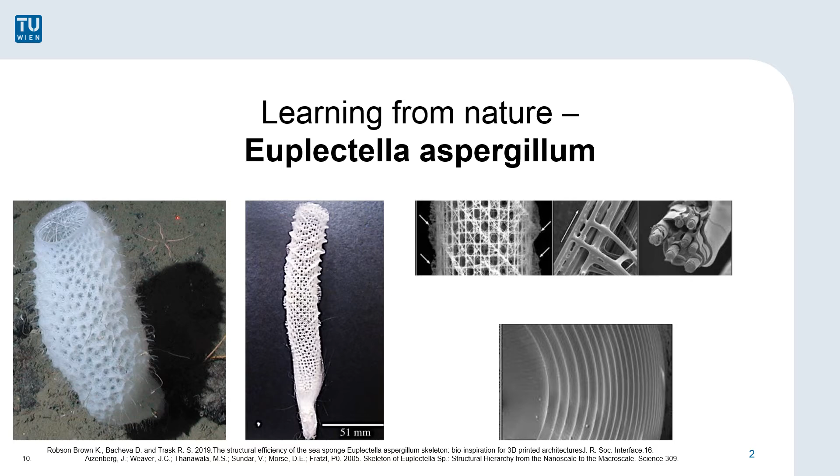Although there is only 1% of proteins present in these spicules, the mechanical properties are improved remarkably. The fracture resistance of the skeleton is 3 times higher than that of homogeneous silica without deteriorating other mechanical properties. Through these building concepts, these spicules and the skeleton itself conserve their strength and stiffness naturally gained by the high glass content and additionally derive high fracture toughness values.

So why are the mechanical properties of this deep-sea sponge so fascinating? If you look at the mechanical properties of engineered materials, it is a very challenging task to produce parts which are strong and stiff on one hand and tough on the other. While strength and stiffness provide high load-bearing capability, high toughness prohibits fracture. Typically, these properties are somewhat mutually exclusive.

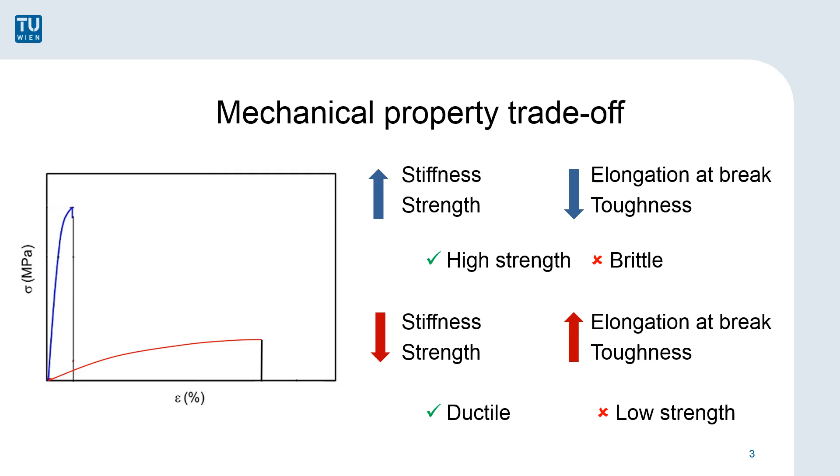We've seen before that the deep-sea sponge manages this impossible task to gain high load-bearing without being brittle like glass. The underlying effect is called the material inhomogeneity effect. The fracture toughness of a brittle bulk material can be drastically increased by the introduction of thin compliant material layers. For this effect to work, the mechanical properties of these materials have to differ substantially. The Young's modulus of the bulk material must be at least 5 times higher than the Young's modulus of the compliant material.

On the left side, you can see a testing sample under tension from top and bottom. Small defects are located inside the sample and statistically distributed. If tension occurs, a crack will start to emerge from these already existing defects. This crack will grow and propagate through the sample until fracture occurs.

The same testing procedure is done with a testing sample where thin layers of another material with significantly lower Young's modulus are inserted. These compliant layers hinder the propagation of the cracks and therefore increase the resistance to fracture. As these soft material layers are very thin, they do not change the other mechanical properties of the bulk material remarkably.

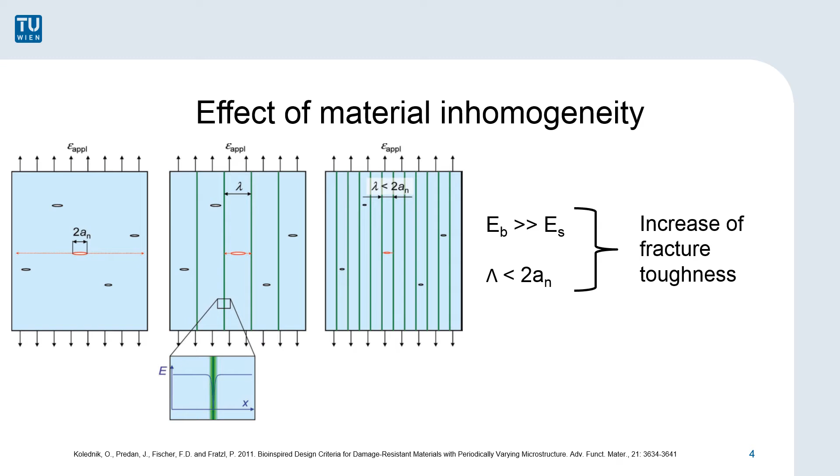With that, I would like to come to the third term, which is 3D printing. 3D printing is based on the principle of the production of samples in a layer-wise process. In our case, the raw materials are photopolymers based on acrylates and methacrylates. In combination with the photoinitiator, these liquid substances form polymer chains and solidify by radical chain polymerization when exposed to a suited light source. The principle of radical chain polymerization is used in a stereolithographic or SLA process.

The liquid material inside the vat is exposed to a UV light source, which induces the solidification of the resin. The hardened material sticks to the building platform. After the solidification of the first material layer, the platform is moved upwards and the vat is coated with fresh liquid resin by a coating mechanism. Repeating this process, we can build a three-dimensional part layer by layer.

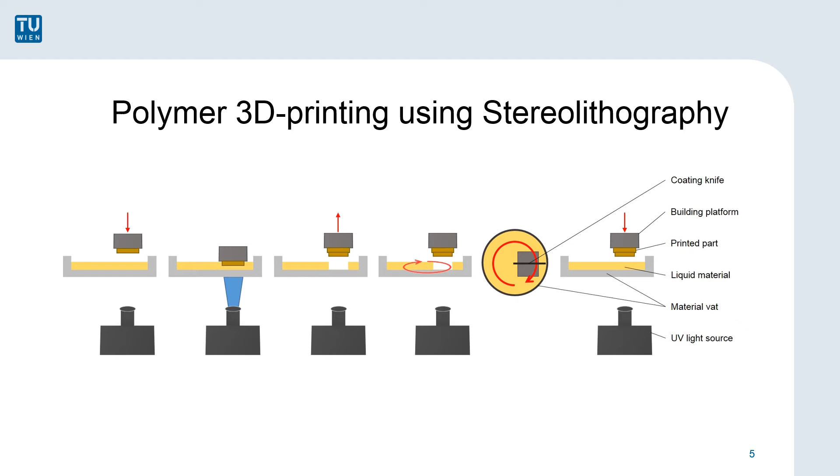In this particular study, the samples are a composite consisting of inorganic tricalcium phosphate and organic polymers. These samples tend to be very stiff and show almost no elongation at break, resulting in a very brittle behavior.

In order to adapt the mechanical properties and improve the toughness of the brittle bulk material, we mimicked the structure of the spicules of the deep sea sponge. A hybrid printing system able to produce samples out of two different raw materials is used. This system consists of the aforementioned SLA process and an inkjet printing system. The SLA produces layers of strong and stiff material, while the inkjet system yields soft, compliant material layers.

In the first step, the building platform moves into the vat with the liquid resin, and UV light is used to solidify the first layer. The building platform with the adherent layer moves upwards and rotates so that the layer faces an inkjet printhead, which is located above the SLA printer. Now, the printhead places small droplets of ink onto the solidified resin layer. The liquid ink is solidified using an LED array.

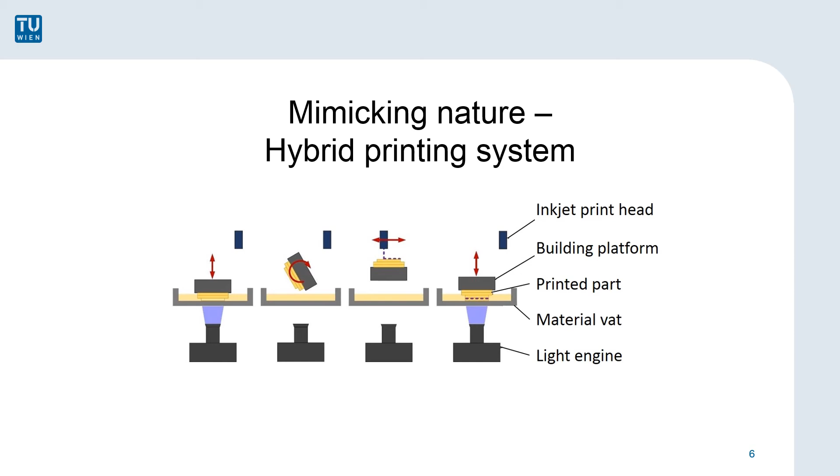The solidified ink adheres to the resin layer and the building platform rotates downwards again. It immerses into the resin vat and the second resin layer is printed. This process is repeated until a two-material part is printed.

The material composition for the resin, which is white, and the ink, which is red, differ substantially. The resin consists of different acrylates and methacrylates to ensure sufficient reactivity and cross-linking. Additionally, a photoinitiator is required for the start of the polymerization process. An absorber prohibits polymerization at undesired locations due to light scattering. Finally, tricalcium phosphate particles are used as a filler to create a stiff and brittle material.

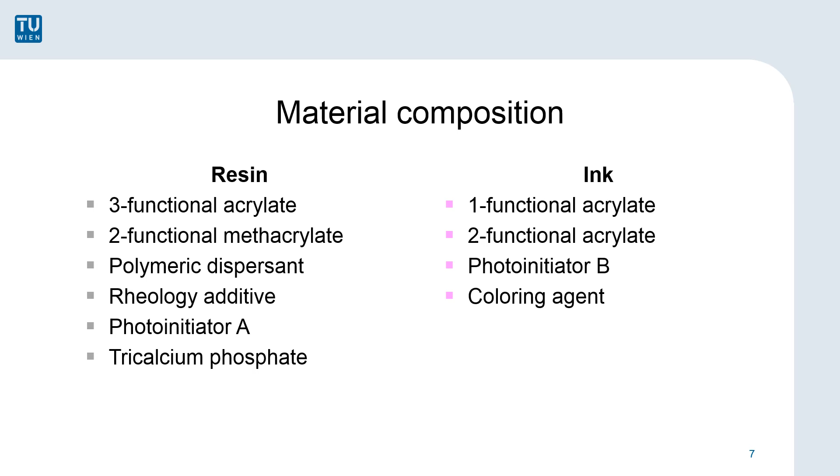The ink, on the other hand, is composed of a low viscosity acrylate, a cross-linking agent, a photoinitiator, and a red coloring agent. This composition leads to a very soft and compliant material. 3 sample groups are printed for the verification of the concept. The first group is built of separated alternating layers of resin and ink. This group represents the bio-inspired approach. The second group is the reference group, solely consisting of the resin. This resembles the bulk material.

To ensure that a potential effect is related to the structure of the samples with separated material layers and not from the addition of a soft material, a third group is produced. This group consists of a blend of resin and ink mixed before the printing process. These samples are printed solely with the SLA process. The amount and the ratio of ink and resin for groups 1 and 3 are identical.

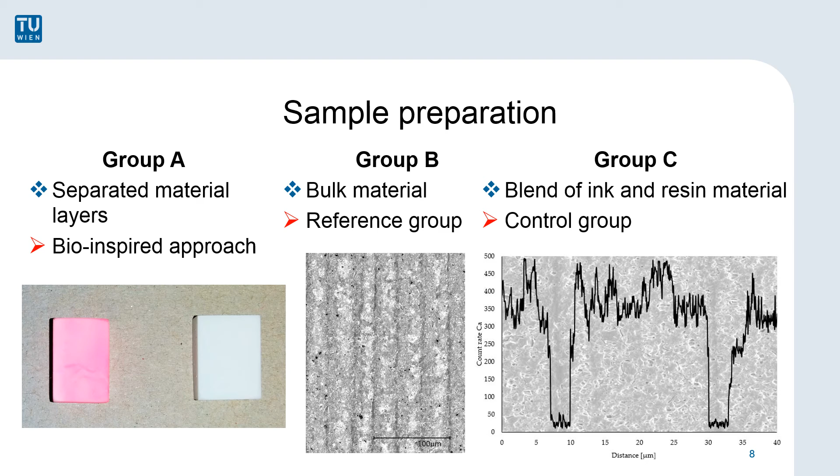A picture of a group 1 and a group 3 sample can be seen on the left side. The red color arises from the printed ink. For a group 1 sample, light microscope imaging of the cross-section can be seen in the middle. The resin layers are displayed in white areas, while the ink layers are smaller dark lines. On the right side, a scanning electron microscope imaging with EDX measurement is displayed. The areas containing ink are visible by their low amount of calcium content.

To test the mechanical properties of the printed parts, Dynstat impact strength tests are conducted. This norm is chosen over more conventional ones like Charpy due to the limited space on the building platform. The samples have a length of 15 mm, a width of 10 mm, and a height of 4 mm. A total of 80 layers are manufactured to gain this height. The samples, displayed with S, are placed in the machine and fixed between the two thrust blocks TB. A hammer H swings downwards and punches through the sample.

The absorbed energy of the samples can be deduced from the height of the hammer reached after punching through the sample. This energy is equivalent to the fracture toughness of the sample. The direction of the force is perpendicular to the interfaces of the layers. This testing setup ensures that the crack has to propagate through all layers of the specimen. Additionally, 3-point bending tests are conducted to gain insight into how other mechanical properties, mainly Young's modulus and bending strength, are influenced by the compliant material layers.

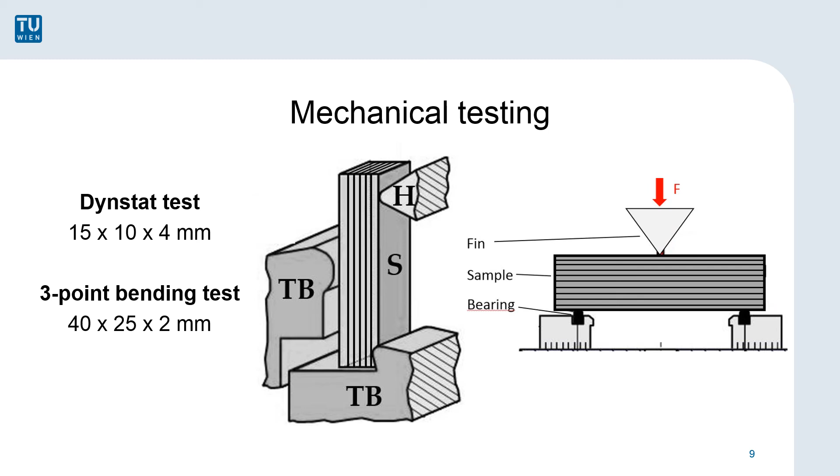The results of both Dynstat impact strength tests and 3-point bending tests show promising results. The samples produced with the bio-inspired approach of alternating material layers display a significantly higher value in impact strength compared to the other two groups. Furthermore, there is virtually no difference between the samples of group 2 and 3. This implies that the simple addition of the soft ink material is not responsible for the toughening effect. It has no impact at all if mixed into the liquid resin before the actual printing process. The effect arises from the existence of separated layers of materials with varying mechanical properties.

Bending tests show a significant decrease in Young's modulus and an increase in elongation at break for group 1 in comparison to the other two groups. Again, this signifies the impact of the internal structure of the parts, since there is no difference between groups 2 and 3. The increase in elongation at break corresponds to the higher impact strength obtained by the Dynstat tests. However, the decrease in Young's modulus is not favored and resembles a degradation of the desired mechanical properties.